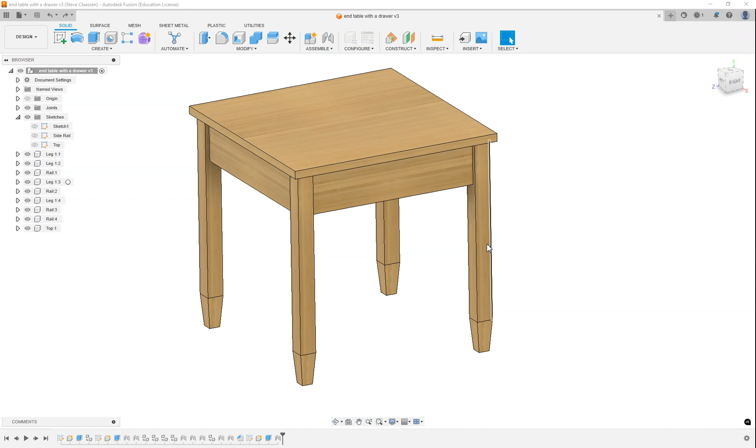To start off with, let's just remove this front rail. We're just going to totally delete it. If I click on it, you can see it underlines over here, rail number 4. Right mouse click, go down to delete. Okay, and delete, yes, it goes away. And we're all good now.

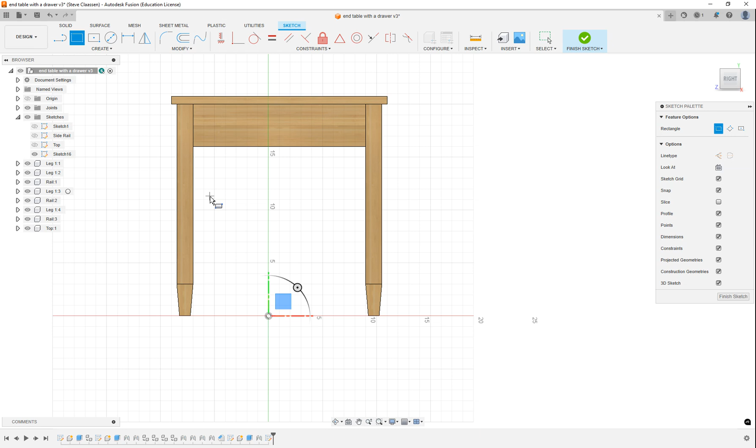So first thing, create a sketch. I'm going to turn this and make it the right view so we can see this. I'm just going to go on this plane so we don't mess up. I've already measured and I know the distance from this side to this side is 16. So all I'm going to do is make a piece of wood that is 3/4 by 16 long, or a sketch of 3/4 by 16 long, because that's the distance between mine, and click on Finish Sketch.

From there, extrude like we always do, put in 3/4 because that's what we're going to use, and over here make sure we put New Component. All right, and click on OK.

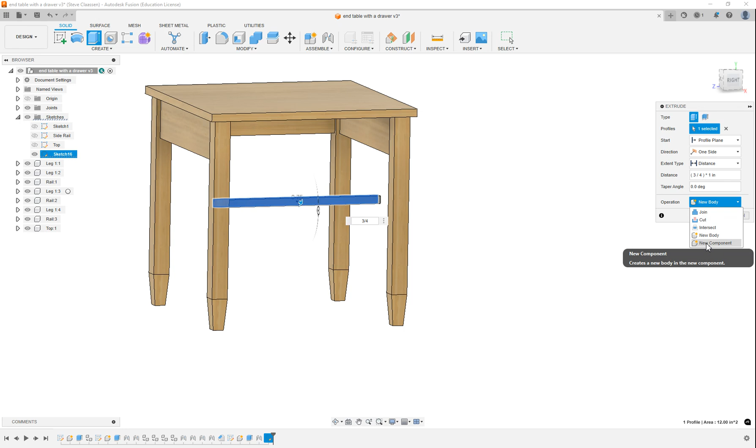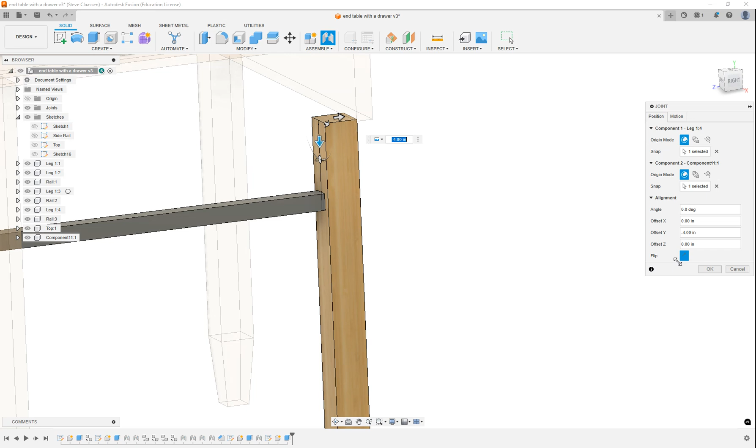So there we go. Now we put it into position, and what we want is for the bottom of it to be to the bottom of here. So for joint, I'm going to go inside here, pick the top of the leg, and then come over here and pick the bottom here of this piece. Now what's going to happen is it's going to go like that, and then I'm going to drag it up to 4 inches. So 4, click on OK, and now you can see that piece lines up with my side rail. So there's the first thing done.

Second thing we're going to do is copy this piece. We're going to put 2 pieces on the inside so our drawer can ride on it. So right mouse click, over here on component. I'm actually going to rename this first and call it front rail, so we have a way to differentiate between them.

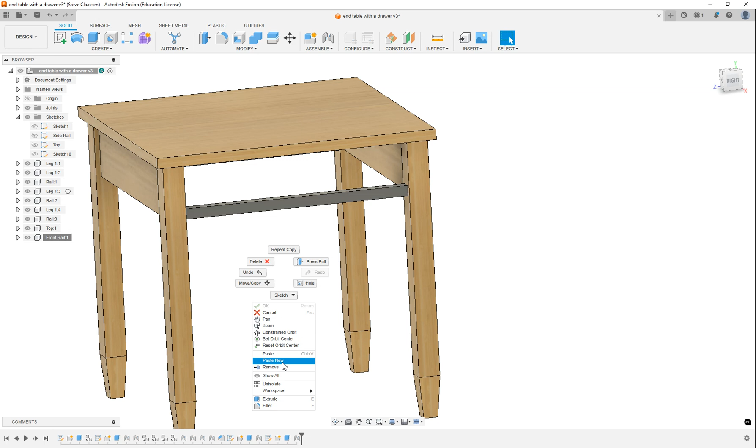I'm going to right mouse click, now find copy. From copy out here somewhere, right mouse click, go paste new. Make sure we do paste new. Okay, we can pull it out. From here, I'm just going to drag it like this so we can spin it 90 degrees. We go like that, there.

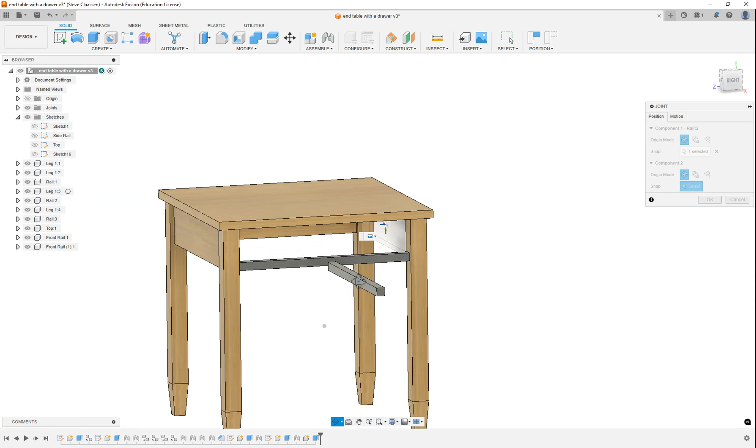Now what we're going to do is take this piece and put it dead center on this rail. So again, joint, go into here, make sure I can grab it nicely so you can see it. Find dead center of that one, spin this one around, find the dead center of this one, and it goes. I love how it does it that way. And we click on OK.

Right, so now when we spin around, you can see it sticking out. For now, that's good enough because we will eventually adjust this. But depending on how thick your leg is, this gets adjusted. What we really want is the distance from this edge right here to this edge here to be 1/4 inch.

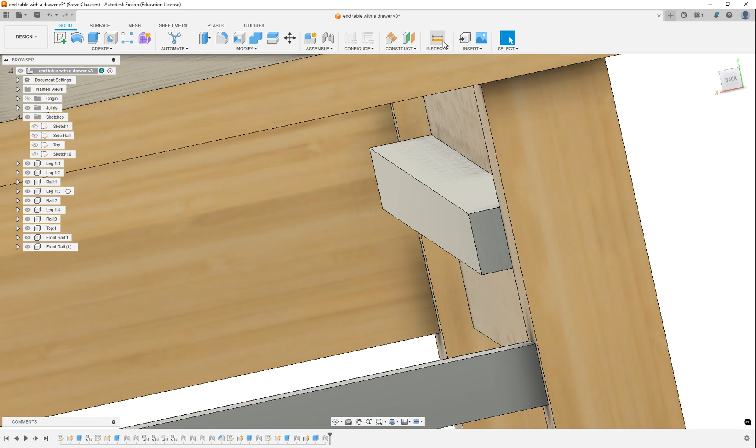So if I actually measured it, I go inspect right now, and I go from right there to right there, it is 0.375, right? So we're actually going to take this piece of wood and make it a little smaller, by 0.125, which is 1/8 of an inch.

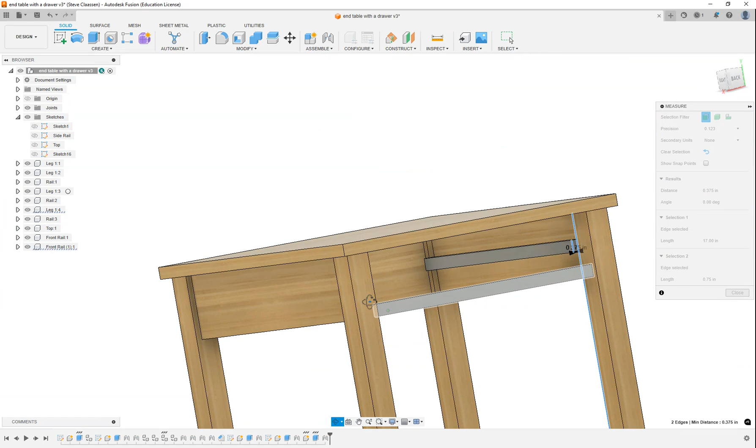So if I zoom out here and say, okay, I want to get rid of that by 1/4 inch, I come down here, I grab, this is our part. I'll just hit escape here for a second. Grab our part here, right mouse click, go edit feature. You're going to notice it's going to go to this one, don't worry about it. I'm going to change this one to 3/4 minus 1/4 is 1/2. Now this one didn't change, but this guy in here did. So there now is our slot.

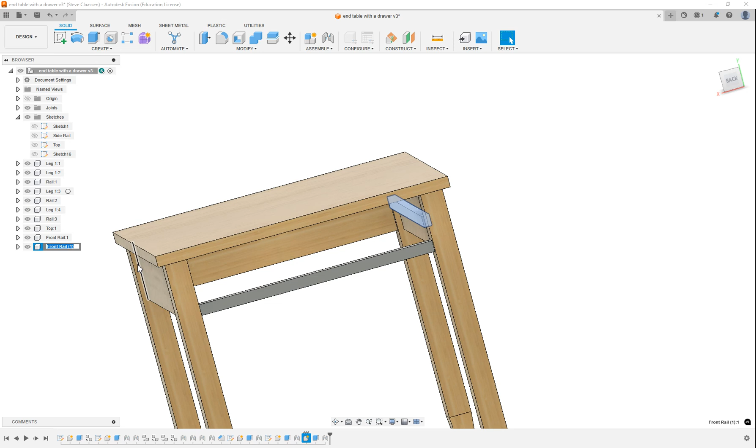And that's there, and all I can do now is mirror it to the other side. So I can go and do a move copy, right? Just pick the part. So this is not called a front rail anymore. I'm going to right mouse click, go rename this one, and I'm going to call it drawer slide. Okay, so there's our drawer slide.

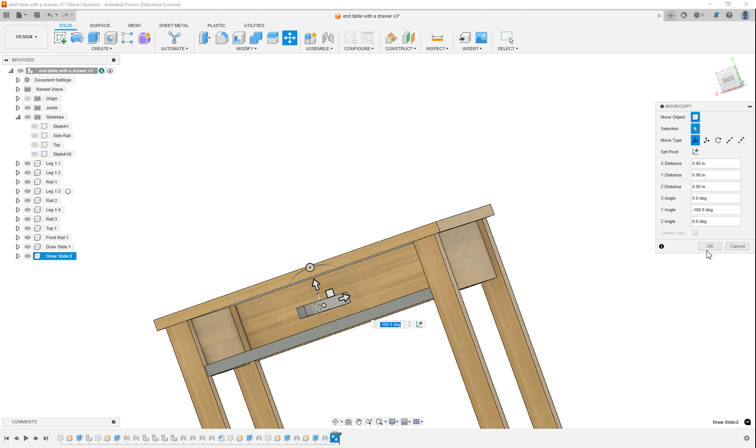Now I'm going to right mouse click on it, copy it, right mouse click over here, paste because we want the identical one, move it, spin it. You know the drill now because you're getting smarter, right? 180 degrees, and then OK. And once again, join it to the center here, to the center of that one right there. Okay, and we click OK, and there we go.

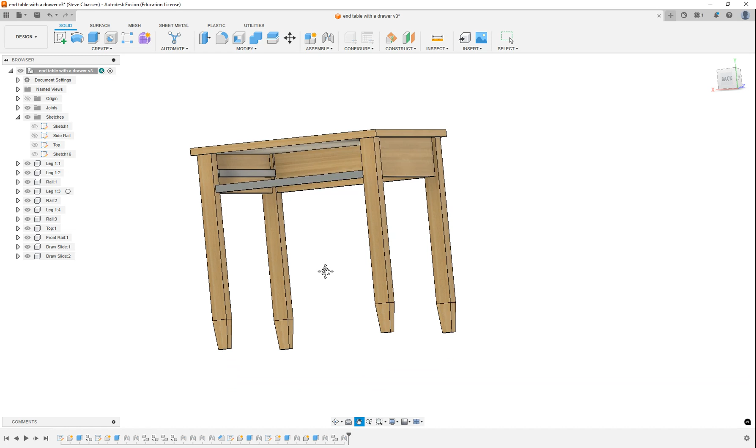There are our drawer slides and our front rail inside our end table. Why does this front rail have to be here? Because otherwise the legs can pull apart. And if the legs pull apart, it means that the drawer falls out of the rails. We have to have the drawer slide on these rails, otherwise the drawer falls down out of the bottom. So there's tutorial number 1 on making a drawer.